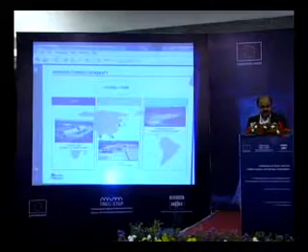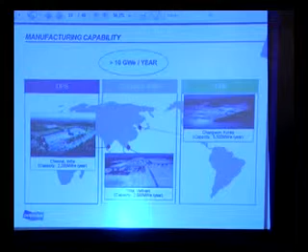The other project we recently won in Korea is 2 x 1000 Shinboryeong, and the design is also in a very advanced stage. We won this contract in March of 2012, and the manufacturing is on. Over to the manufacturing capability of the company. We have got factories of Doosan Power Systems in India, in Chennai, in Poonamallee, and we have got the factory in Vietnam, which was also set up recently. Both of them have about 2 gigawatt of capability per annum, and of course Doosan Heavy, which is in Changwon, has got 5 gigawatt of capacity per year.

Now I'll slowly move on to the relevance of today's discussion. Why R&M? When you look at the various options that we have, we can either go for a new plant, of course, which is a business by itself. And when you look at options, India is a very important context because there's a fleet of boilers supplied more than 30 years ago which are all ready for R&M, and every year CEA lists a certain number of projects for R&M, but after some time something comes as an obstacle, and those projects don't kick off. But still, if the R&M can happen, there is quite a good potential for us to improve the efficiency, and let's see how that is possible.

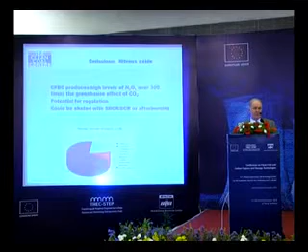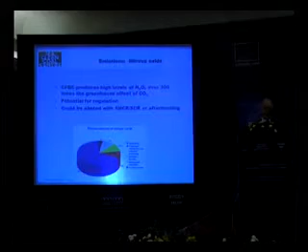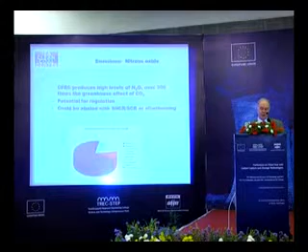Nitrous oxide, N2O, is a particular issue with CFBC units. N2O is produced in significant concentrations, but we're talking the ppm level. It's still significant, because it has 300 times the greenhouse effect of CO2. So we do think that at some point, if CFBC units start getting widespread, then there may well be regulation coming in on those issues. It could be abated with SNCR or selective catalytic reduction or afterburning, but of course that adds to expense.

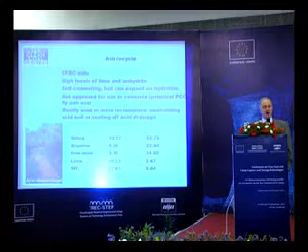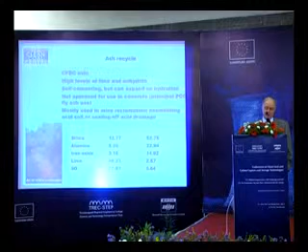On recycling or reusing ash, CFBC again has a little bit of an issue compared with pulverized coal. You get high levels of lime and anhydrite in CFBC ash. It tends to be self-cementing. It's not approved in most jurisdictions for use in concrete. A lot of PCC ash gets used that way, but not a lot of CFBC ash. So it tends to get mostly used in mine reclamation activities, neutralising acid soils or sealing off acid drainage.

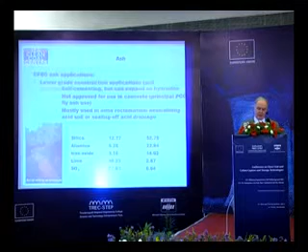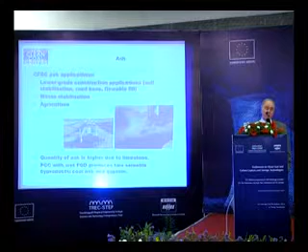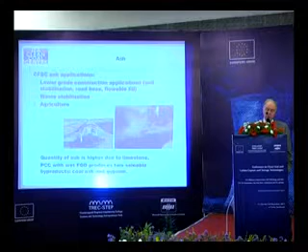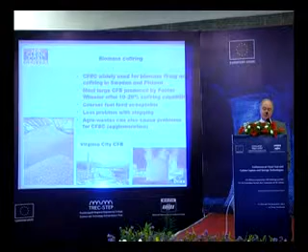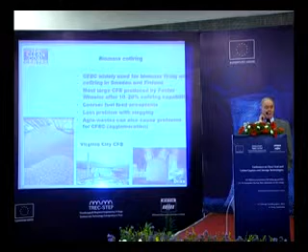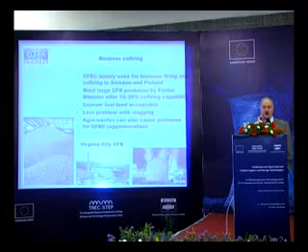CFBC can also be used with biomass firing and co-firing in Sweden and Finland. Actually, that's a misstatement. I'm going to take my guys to task for that. I know that CFBC actually started out way back with small thermal units in the 1960s and 70s as a technique for burning up wood wastes. It was only later that CFBC started to be applied to coal. But today, most large CFB units, particularly Foster Wheeler, offer a 10 to 20% co-firing capability as a standard thing, so that can be quite useful.

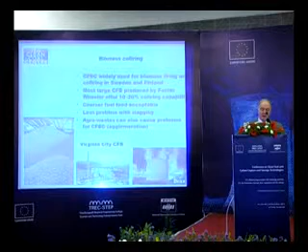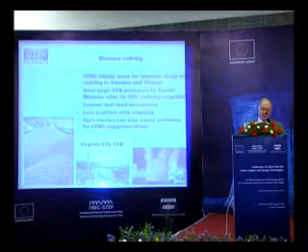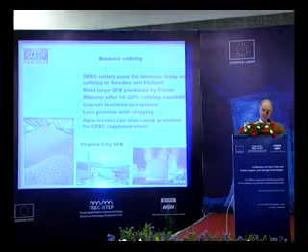You can feed coarser fuels. You don't have to go down to the extent of pulverizing to small micron sizes. It says here you get fewer problems with slagging. That's because of the lower temperatures of operation. But agricultural waste can cause problems with CFBC. There must be some instances of agglomeration problems with certain agricultural wastes.

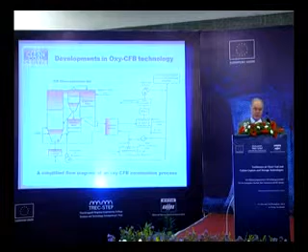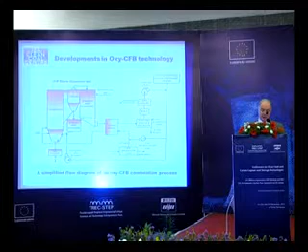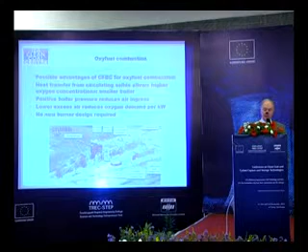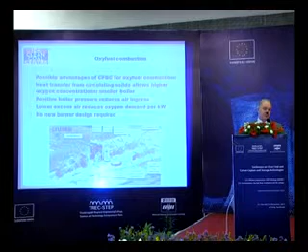I want to say something just in passing about oxy-CFB, oxy-fuel-based, air separation using oxygen. This is a technique which I know you're interested in here in India, BHEL in particular, but other organisations are looking at it as well. The picture on this slide is of a facility at CIUDEN in Spain, which is a splendid place for testing CFBC for oxy-fuel combustion. They actually have a PC unit next to a CFBC unit for comparative purposes. It's a Foster Wheeler supplied unit, and they're also linked to doing carbon capture.

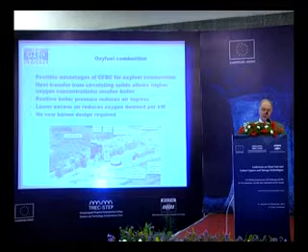What they say is that the heat transfer from circulating solids allows higher oxygen concentrations, which gives you a smaller boiler. They operate at positive boiler pressure, so that reduces air ingress, and the lower excess air that you use reduces oxygen demand.